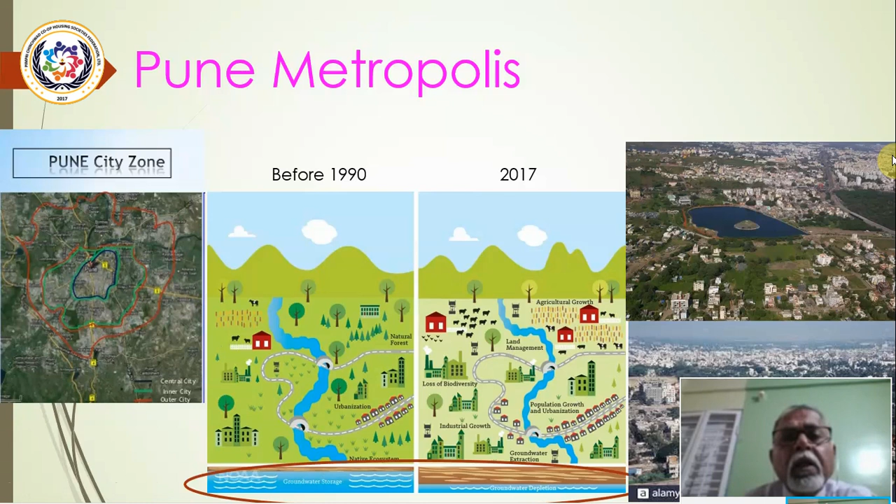Now, what are the lifelines? Himanshu sir has nicely explained about the watersheds, and these are the lifelines of the city. And Pune is really a city which has been blessed by the lifeline network. Earlier, if you see the network, every drainage was carrying the water.

Now, what has happened? Most of the drainages, or the nalas, or the rivers, or the rivulets, they have been made just like a cement channel. Is it a cement channel? My dear friends, no, not at all. It is a lifeline because the drainages are created naturally. Nobody has created them, and nature creates its own path where it gets least resistance.

The drainages are developed. Least resistance means where the rocks can be easily eroded by the river water. So you can imagine why the nalas are born only at this place. It is only because there the rock could be softer, the rock could be easier to recharge also. So this is how the lifelines are very much important from the Pune city point of view.

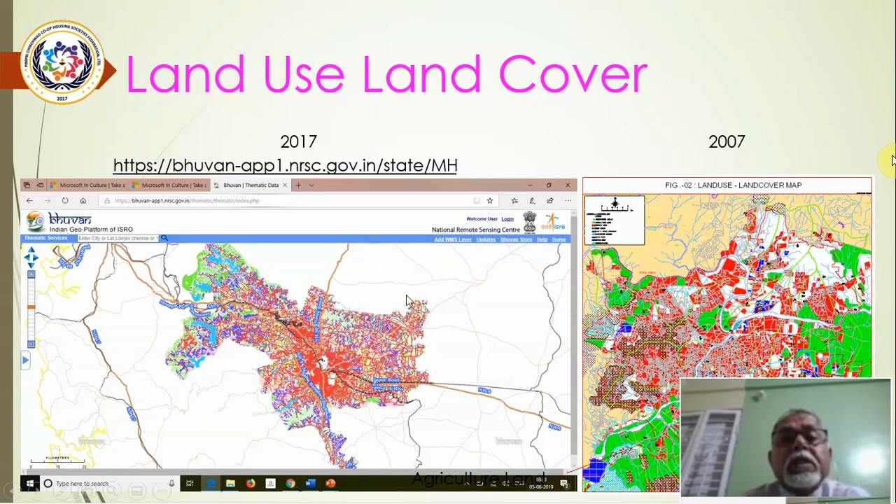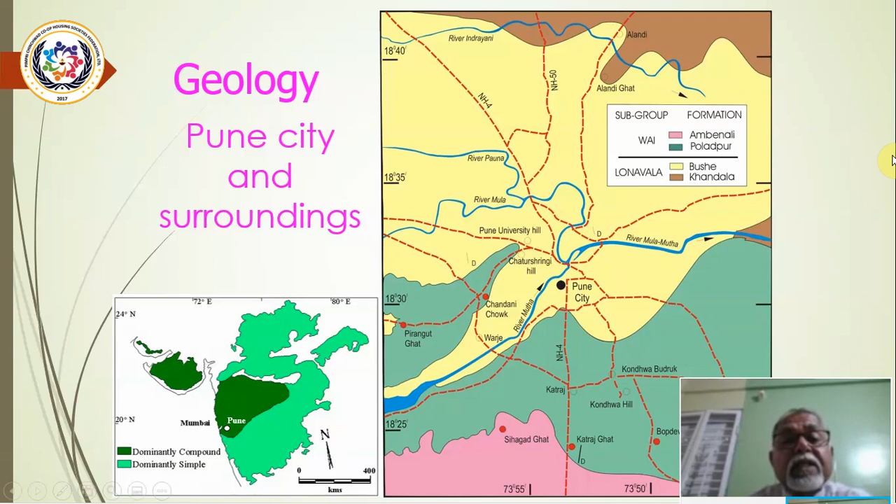Unfortunately, in Maharashtra or even the complete Deccan Trap, where we are sitting today in Pune city, the green color doesn't indicate that it can hold good groundwater. No, not at all, my dear friends. It has many limitations as far as groundwater storage capacity is concerned. One more map, that is a groundwater prospect map of Pune city I have tried to show you here.

Classically, the government of India along with the state governments have done a fantastic job. They have mapped the entire country, and the groundwater prospect maps are available in the public domain also. What they indicate, my dear friends, please try to understand.

Because Pune city, if you talk in terms of square kilometers, has surpassed Mumbai also. Considering the Pune and Pimpri Chinchwad metros, the area is more than 600 square kilometers. So you can imagine how many villages have been brought into Pune city, and how diverse is the geology below the Pune city.

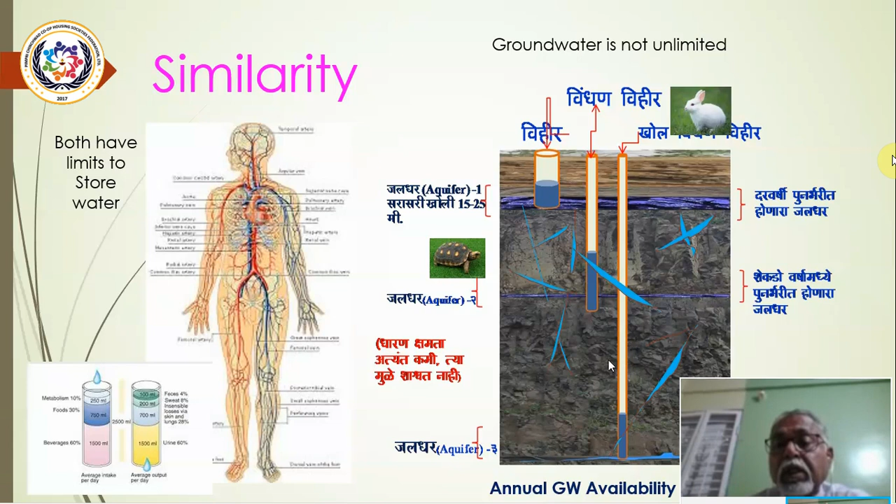So this water is taking hundreds of years, more than hundreds of years, and the recharge area is far away; we are not aware also where the recharge areas are. So that is why they are to be kept for scarcity, when we must get that water.

Again, one more science which is directly related is the pulse of groundwater. When you go to a doctor, he checks initially the pulse of your body, and based on that he tries to diagnose. Similar is the situation. Himanshu sir has shown you some of the graphs. I'm just trying to give you the idea why these are very important, because if you are measuring the water levels, then you are able to understand how my groundwater is behaving with space and

time. Because water has two dimensions. If you see the surface water, space and time, but as far as the groundwater is concerned, there is one more parameter, and that is depth. So that is why it is very important to get the support of a doctor who knows how the groundwater levels are behaving.

Because unless and until you go to a doctor who is learned, who is aware of the aquifer, he cannot tell you what is actually the problem and what actually is the solution and what has to be done.

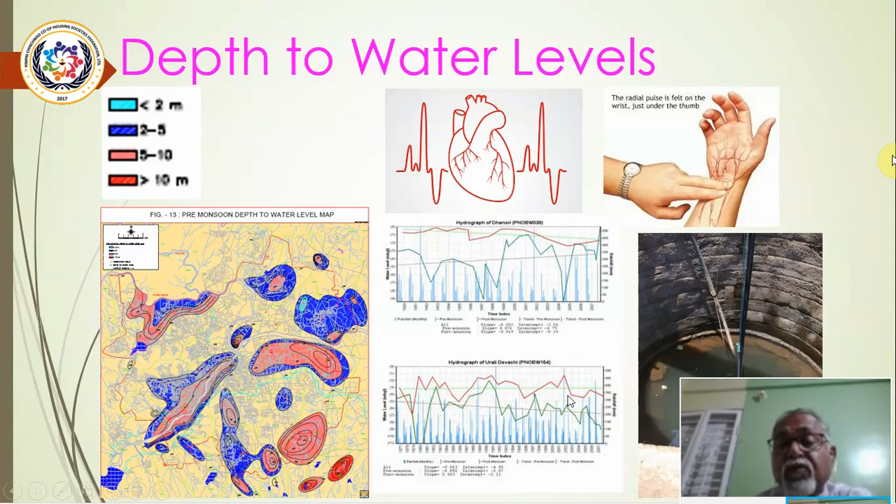Now, these are the maps, just to give you the idea that Groundwater Surveys and Development Agency in 2007 did the detailed hydrogeological survey for Pune city. And they came out with this map of the recharge areas. What are the recharge areas? These are some of the recharge areas by which you are able to know where the societies should go for the recharging of the wells, and which locations should contribute more to the artificial groundwater recharge.

This is the water availability and use. I'm not going into the detail, but just let you know the well density is highest in Pune city, that is 122 bore wells per square kilometer. My dear friends, the carrying capacity of roads is, if the road is a 4-lane road, then 4 cars can go at a time. And if that capacity is exceeded, what happens? You know, there is congestion, there is a traffic jam.

Similar is the situation. Now the well density is supposed to be technically 8 wells per square kilometer. Now it is 122. So you can imagine, in one 1 liter Coca-Cola bottle you are putting 122 straws. So you can imagine how much you are going to get, and why the borewells in Pune city are getting dried up in the months of March, April, and May, slowly. So groundwater is very important, especially during drought or during scarcity.

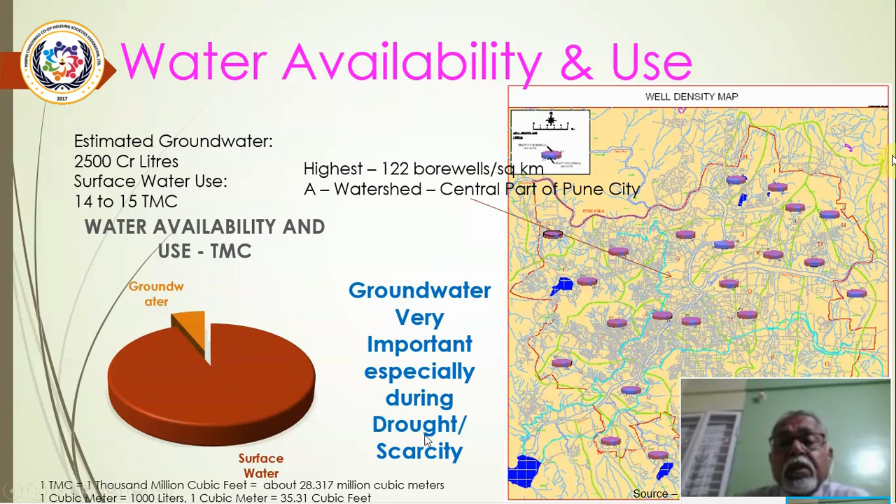Now, this is the list of the areas which are potential recharge areas. If you see the tankers plying in Pune city, in many societies the tanker is the lifeline now. Maybe we are in the month of May, so probably the tanker could be the lifeline for them. But unfortunately, if you see the areas from where they are abstracting, you will find that all the tanker suppliers have drilled borewells or have dug wells in these recharge areas itself.

So that is why they are not allowing the recharge to happen. Maybe naturally also, and maybe artificially they are not allowing. So because of this, the recharge into the aquifers is not happening completely. So in many cases, in the heart of the city, the recharge area could be located maybe in the north, maybe in the south. That has to be identified.

And luckily, ACWADAM came out with the aquifer map of Pune city. So we must use those maps for this purpose, and then only we can say confidently that whatever rainwater is falling on our society can definitely go into the aquifer. Please try to understand it.

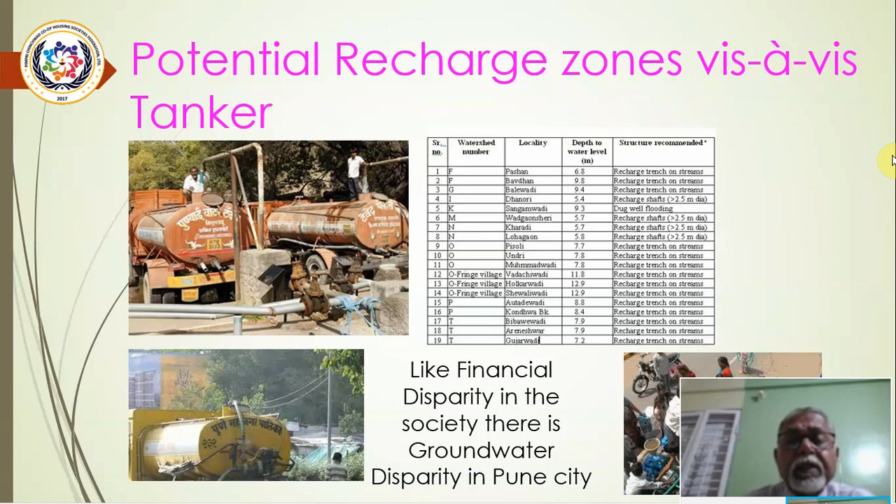Similar is the situation. If the society is asking that we want to do artificial recharge, but unfortunately the aquifer is not of good potential, then maybe that society cannot go for the artificial recharge. So artificial recharge is not possible everywhere. Maybe it could be possible in those places where we have a good aquifer potential, good recharge capacities. There only we can put a good quantity of groundwater.

Why is sustainability of groundwater very much important? My dear friends, I'll invite your attention to research published in Nature. Five scientists from different countries came together and published a research paper in Nature that says that in many countries the aquifer, that is the groundwater, could get exhausted. In many countries, the aquifer is going to get dried up also. So these are some of the hints which have been given by recent research.

Similarly, recently the Honorable National Green Tribunal, NGT, has given a decision in Delhi that the recharge structures which have been constructed, especially in municipal corporation areas, are contaminating the groundwater. So they have constituted a committee to find out what is the reason behind that and who is the culprit. Now, based on this scenario, does it mean that we don't have any remedial measures? Yes, my dear friends, we too have remedial measures.

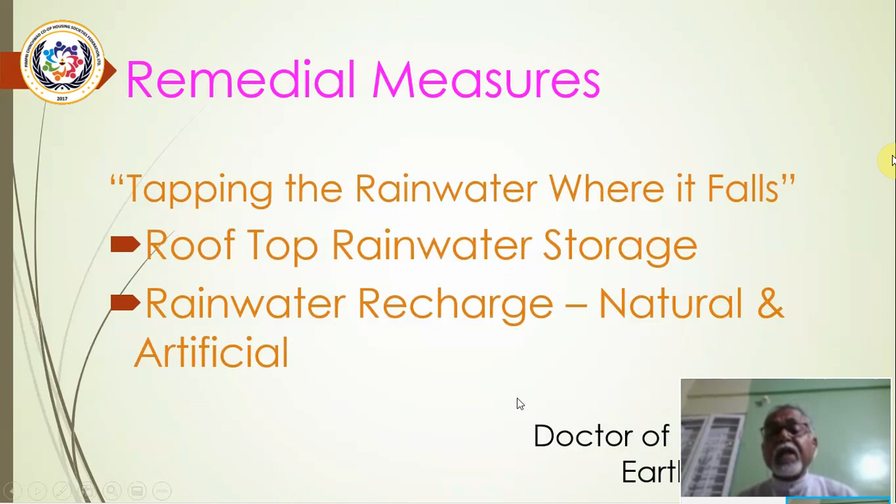So what is important here, my dear friend, the doctor of Mother Earth must be consulted. Then only you will be able to understand what is the scenario in your society. Now, what are the different tests which are very much important? Like when you go to a doctor, the doctor gives you a list: go for blood checking, go for the CT scan, go for the X-rays. These are some of the tests which we are very much aware of.

But for groundwater also, please try to remember that these are some of the scientific tests which should be carried out, and then only you can decide whether you can go for artificial recharge in your society or not. You can call it a protocol.

The protocol first says that geohydrological studies are very much required. Unless and until you are aware of the groundwater availability below the society, that means the rocks occurring in the society, unless you are aware of the hydrogeological scenario, it will be very difficult to tell you how much quantity of water can be stored additionally into the aquifer besides the natural replenishment. That means, in other terms, whether the aquifer is available there or not.

Then third, a very important parameter: how much is the storage capacity? Let me explain. If you take a tank of 1 meter length, 1 meter breadth, and 1 meter height, that means it is a 1 meter cube, that is equivalent to 1000 liters. Suppose this is a tank and this is a rock which is occurring besides your society.

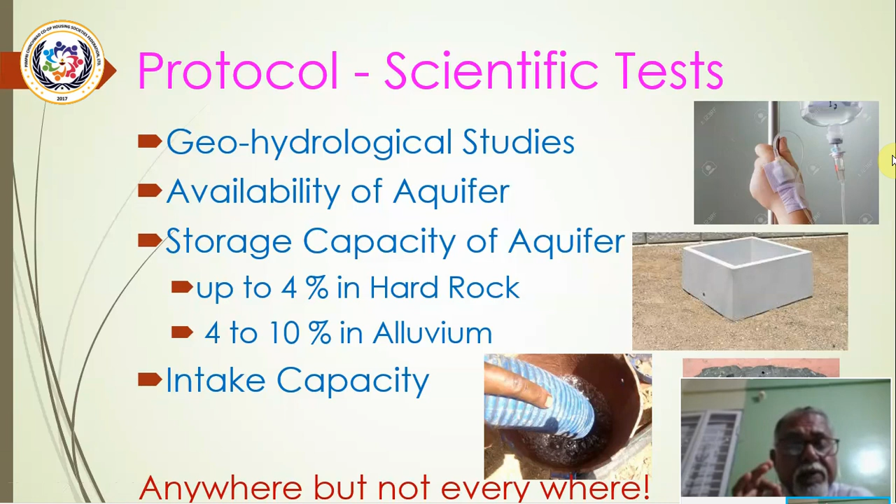So, anywhere but not everywhere. Please try to remember this phrase forever: rainwater harvesting anywhere, but not everywhere.

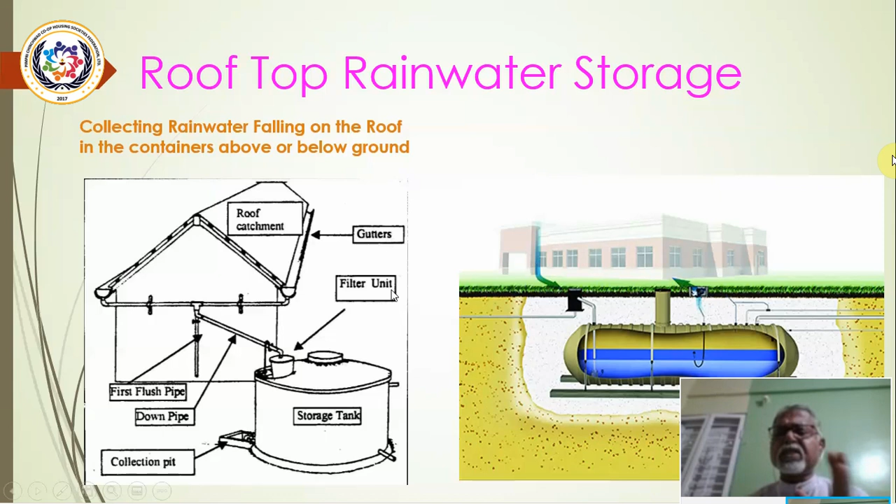This water can be stored above the ground or below the ground. These are some schematic pictures I have tried to show you, of how you are able to calculate this, my dear friends.

The formula is very simple. Suppose this is your roof area - what is the area of the roof in square meters - then you have to multiply it by the roof coefficient and by the rainfall in meters. Meter means we measure the rainfall in millimeters.

So 1000 millimeters is equal to 1 meter. The rainfall in millimeters has to be converted into meters, and you have to multiply by 1000 so that you can get the value directly in liters.

Likewise, the coefficients are different, but as you go down onto the soil, the soil coefficient is not given here, but if you look at the coefficient of soil, it is only 0.1.

So you can imagine, 90% of water, when it falls on soil, gets converted first into soil moisture, and when the infiltration gets completely filled to the capacity of the soil, then groundwater movement starts.

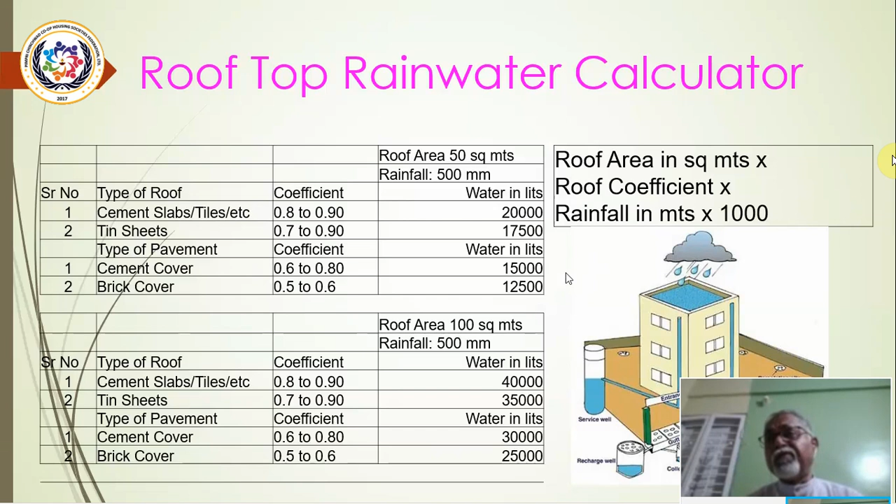Last year, in 2019, we saw the havoc that happened in Pune city due to rainfall. It was only because most of the rainfall fell within a short time, and because of that, the surface runoff was very high.

Now, artificial recharge through dug wells and bore wells is possible, but the bore well should be successful.

Please try to remember these are the natural conducive media. So for the discharge, there is one more test for a bore well - societies that have a bore well should perform that test.

If they are yielding more than 2000 liters, then only that bore well will accept the water artificially. The scenario is similar for dug wells also.

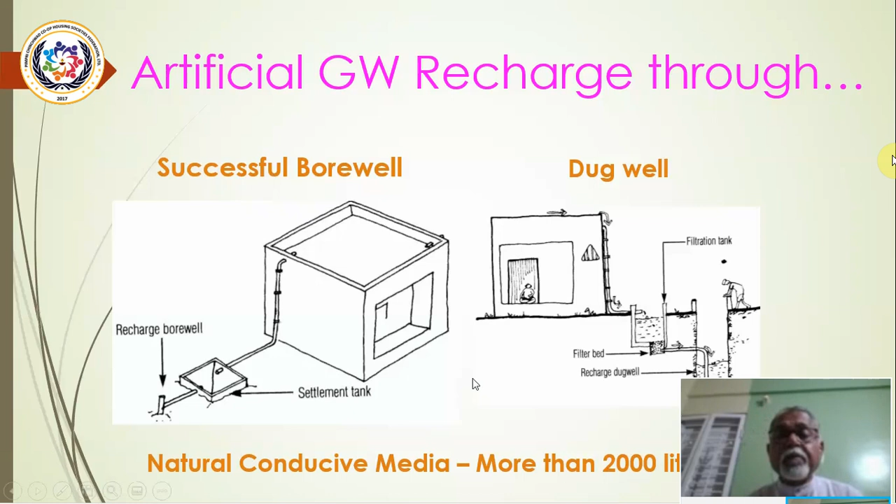You have to construct a filter bed. As you can see, this filter bed is very essential.

Now, one more location-specific artificial recharge measure is the soakaways. So soakaways are also very important here.

I wanted to show you a video here, but that may not be possible because I'm missing the link. Luckily, Pune Municipal Corporation tried these soakaways on Taljai Hill, where they used cement bricks that are all pervious bricks.

So I think if societies have cement blocks or paver blocks installed, wherever they have used them, they can replace these with soakaways.

Now they are available in the market, so that most of the water falling on these surfaces can slowly go into the soakaways or slowly pass through.

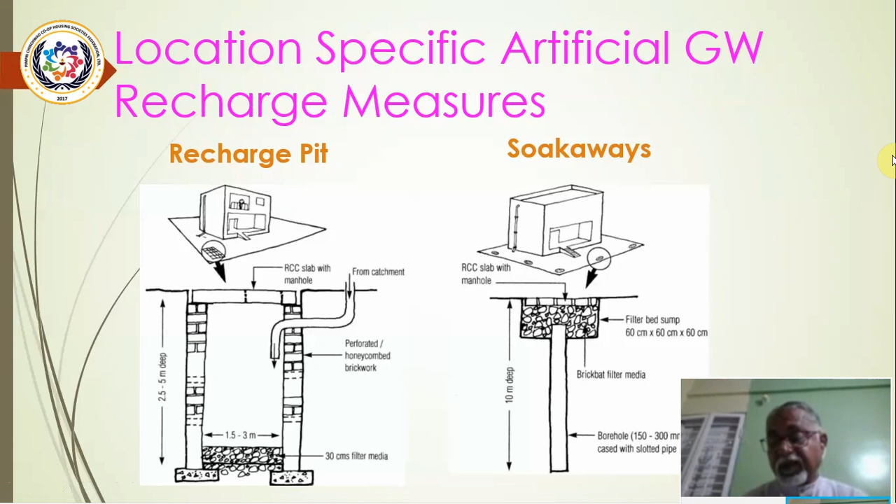We can also construct filter beds, and through those, most of this storm water flowing over the surfaces can be taken to the groundwater.

Now, a filter is mandatory and very important - very essential, because unless this is done, the rainfall falling over the roof is a problem, since the roof is nobody's area at present.

Roof is nobody's area, nobody cleans the roofs, so dust gets collected over the roofs.

During the first shower, along with the dust, bacteria can also come, because the house of bacteria is your dust.

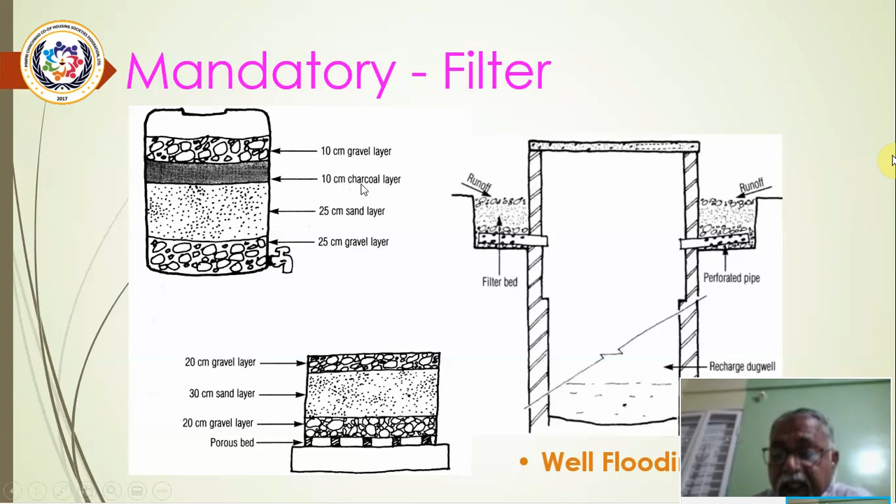They get accumulated or absorbed over the dust, and get passed into this recharge system also. That is why the filter is very much essential. Without filter, there are various filters available, and they reduce not only the velocity of water, but also stop the particulate matter. If you are introducing coal or charcoal, they definitely absorb some of the bacteria also.

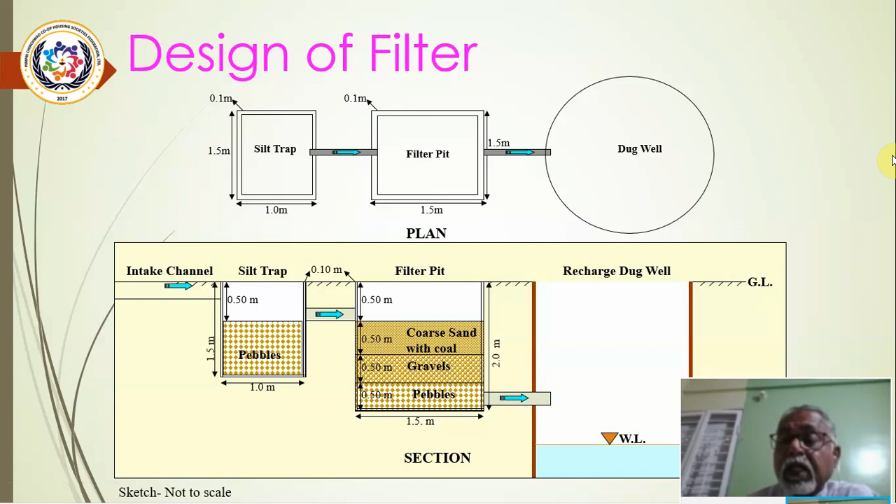Now this is the design of the filter, and that is how it looks. A silt trap, a filter pit, and a two-pit filter system is recommended by government also. If it is a rooftop, then it's okay, you can directly use a filter pit. But if it's the storm runoff, then a silt trap is very much essential. Two pits are very much important, and you can connect them from the top, and with the help of coarse sand, coal, gravel, pebble filter, you can put the water into the dug well, because the dug well water you are using, even if it is for day-to-day life other than drinking, should be of potable quality.

The quality needs to be definitely tested, my dear friends. The testing lab of Pune GSDA, located in Shivaji Nagar, is an NABL accredited lab, and they charge minimum for testing water quality. Please do get this water tested annually, because you are not sure. At least twice a year, pre-monsoon and post-monsoon, you should test the water if you are using groundwater, because after the rainy season, the groundwater may get contaminated with bacteria. If you are using it without testing, it may harm.

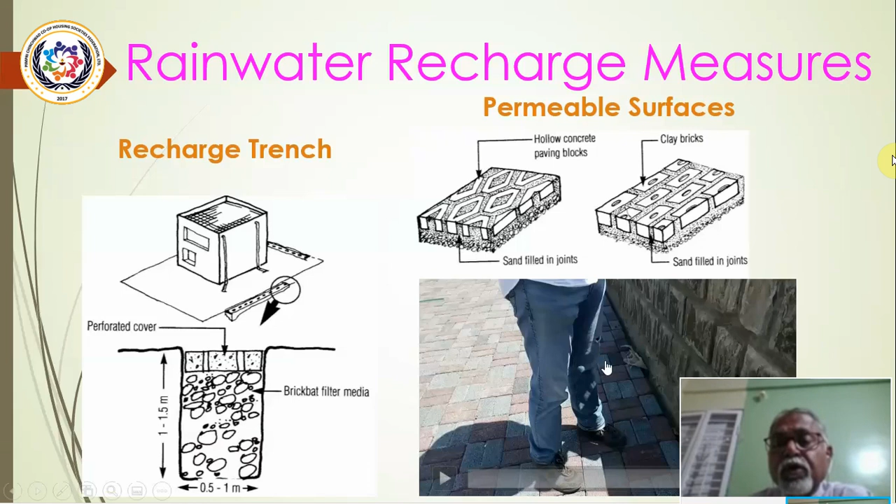So that is why it is very good to test it. Now this is the video which I was showing, some of the permeable surfaces. You can see how that brick, which has been prepared with the help of cement, is a porous one. This brick is of the same strength which a paver block has. This is at Taljai Hill, Pune.

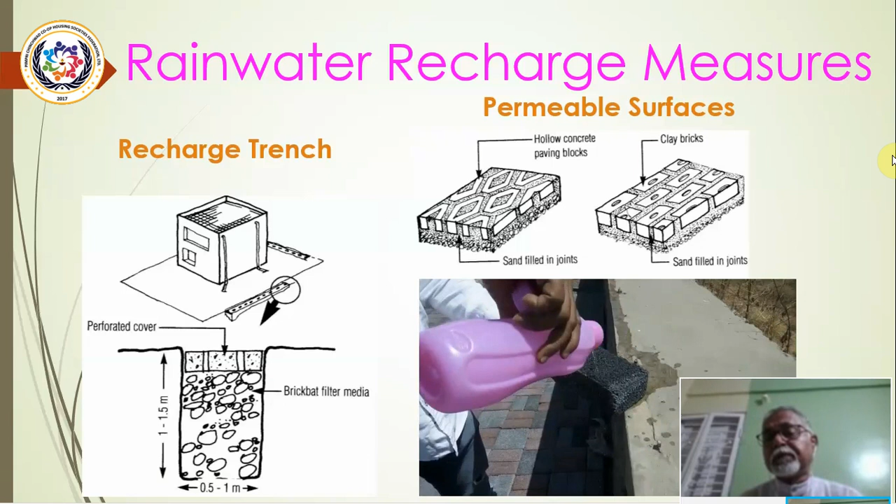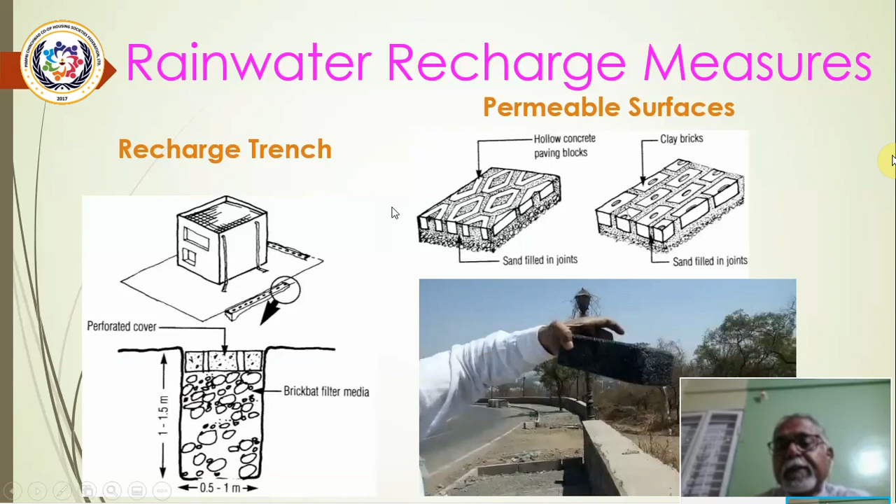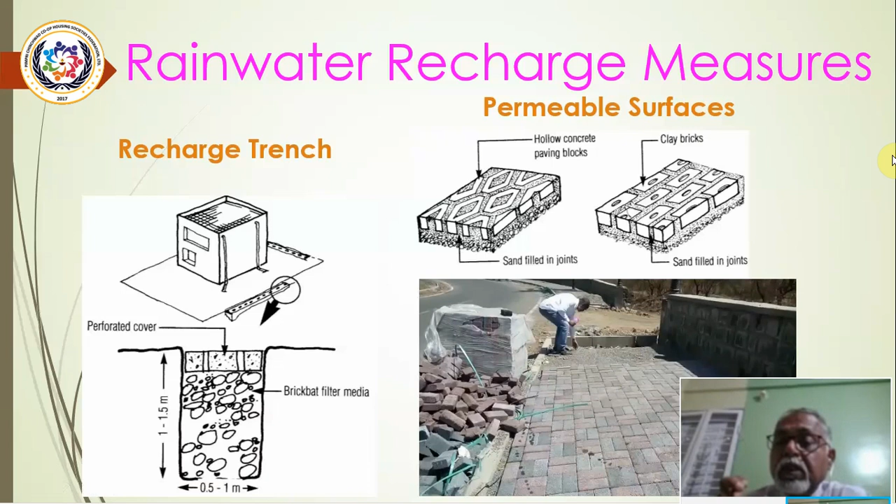So you can use these permeable surfaces. We have tested this by mission groundwater also, and luckily, after discussion with the Pune Municipal Corporation, they have agreed that everywhere, at least in the areas where footpaths are there, those footpaths can be used as media for artificial recharge also.

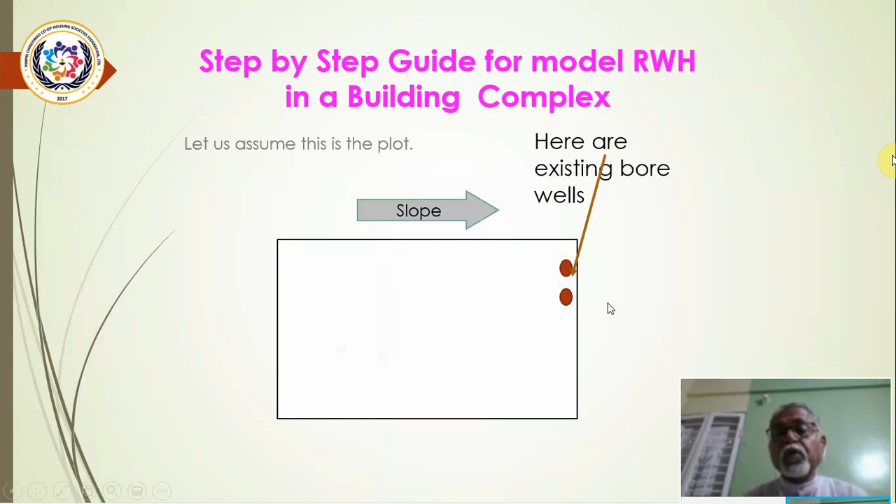Now, step by step, I will try to show you how in a building complex you can go for an artificial recharge structure. Suppose you have existing bore wells, then it is always advisable to go for the construction of new recharge bore wells, so that the quality and the quantity can very well be saved.

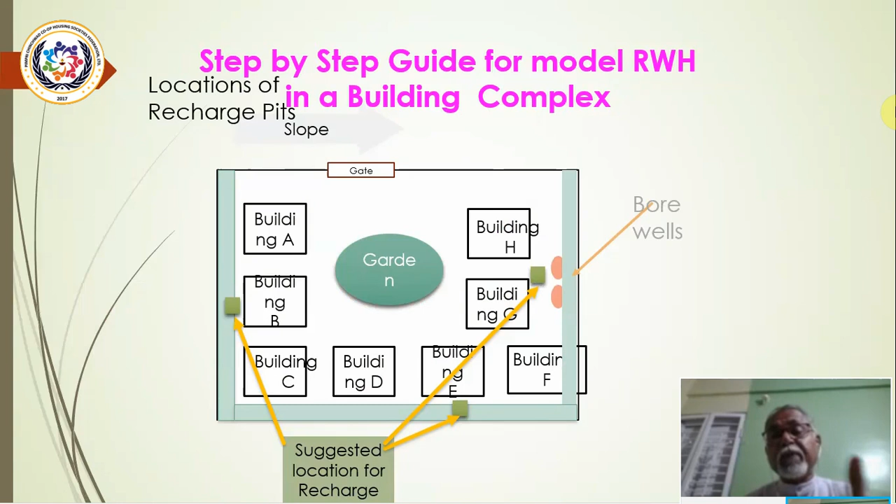Suppose if these are the buildings, and based on the aquifer availability in your society, if the groundwater is moving from this side to this side, then one bore well can be constructed in the upstream and one in the downstream of the society, so that in both bore wells the large quantity of water getting available from the rooftops of these buildings can very well be used for artificial recharge. This is how you can plan based on the database available, that means with the architect.

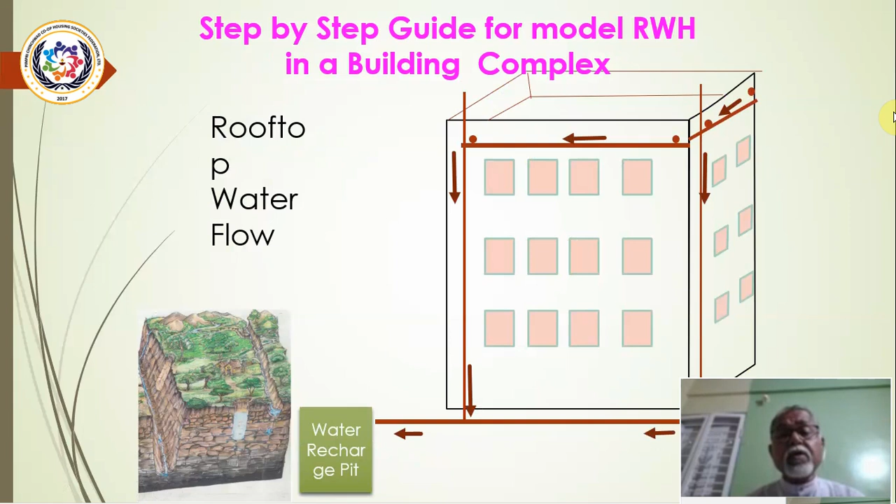So this is how a recharge pit is constructed, and the complete water flows in. For this purpose, it is always better to go for mathematical calculation. A simple formula which I have shown you has to be used in calculating this, and based on that, what is important is that you have to go for the location-specific measure for artificial recharge.

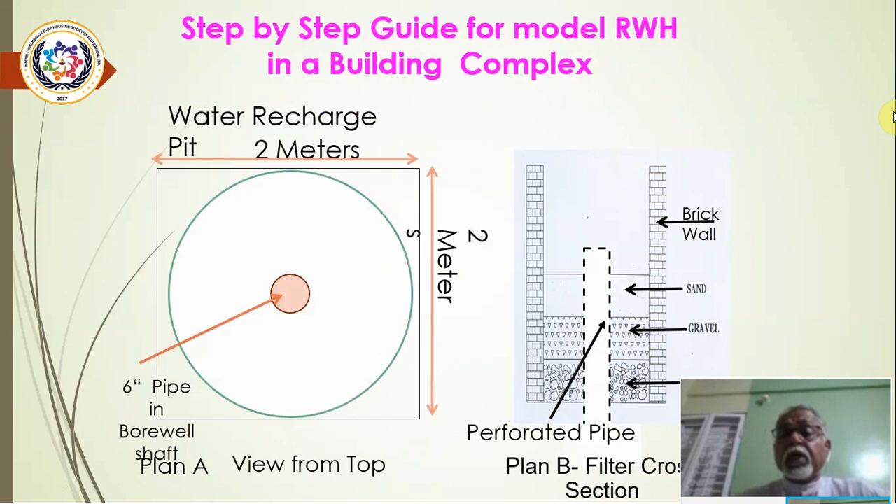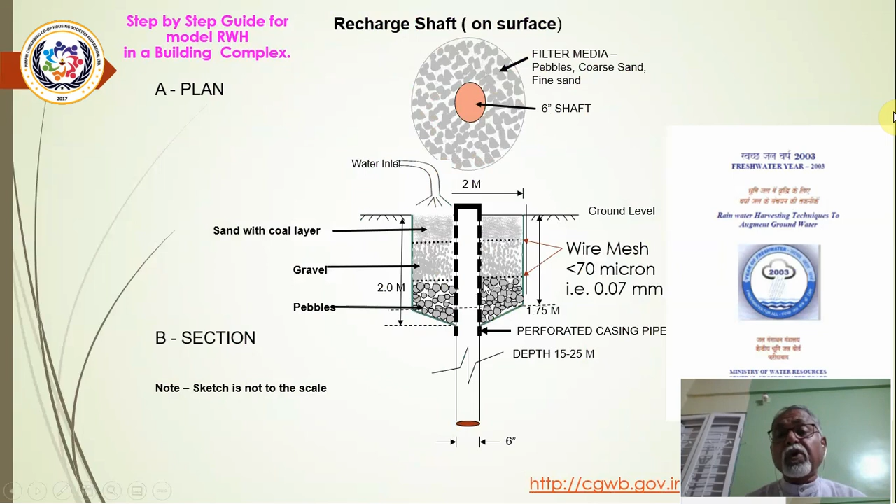In a recharge shaft, you are drilling a separate borewell exclusively for artificial recharge, based on the availability of the aquifer. Put a filter media, and mesh is very much important. Likewise, you can go for the construction of artificial recharge structures. The artificial recharge structure is just like a bypass. This is how one structure works - this is just for your understanding - and see how the groundwater moves into the aquifer if you drill a recharge shaft at a proper place.

So this is how, through a recharge shaft, the groundwater moves into the aquifer, and if the aquifer has a very good capacity, then based on the capacity, we can go for this bypass surgery also.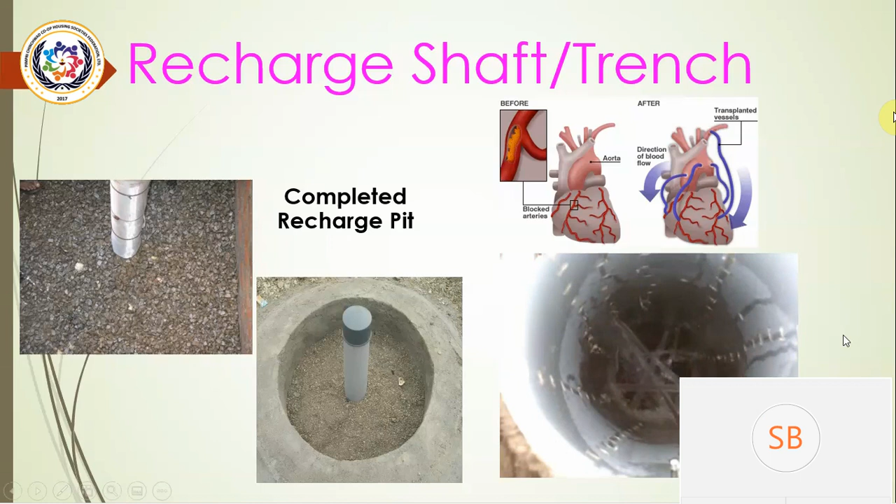plan has been overlaid with the aquifer map, and now we can definitely advise Pune Municipal Corporation that suppose the area of survey number 41 is not reserved for garden, then we can recommend them that yes, it is very much required. Luckily, this is the area which has been reserved for garden.

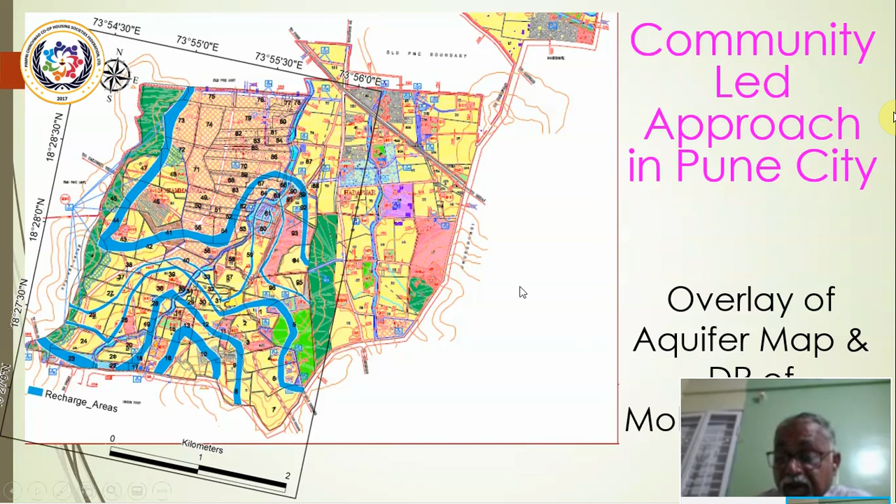So this area you can use for artificial recharge, so that based on the slopes and other parameters, we are able to go for the community-led approach even in urban areas like Pune. We are carrying out one experiment in front of the Dr. Dada Gujar school in Mohammadwadi. This is the plan which has been prepared.

Thanks to the local corporator, he has principally agreed, and he said that whatever you want, I'm going to give that much money for artificial recharge. He wanted to create an experiment. He wanted to show this is how.

Now this was earlier an earthen nala bund over which Pune Municipal Corporation has constructed a road, and then subsequently the bridge also. And when this was dug for renovation for artificial recharge, see how eco-friendly it is. The spring started coming. Even the birds started coming. This is how the fresh water is coming.

So you can see it was earlier just a waste, but now after renovation, this picture we took in the month of February. You can see the fresh water started coming into it. That's completely spring water. So this is how we should revive the aquifers and the old existing structures.

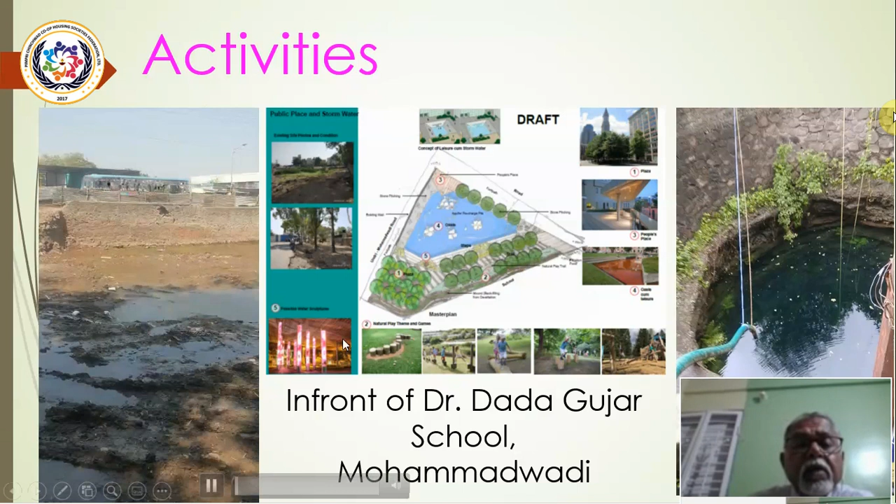Below this earthen nala bund, there is a well. From this well, tankers are plying in Hadapsar, meaning the complete Mohammadwadi area and adjoining areas. So there are more than 10 wells downstream of this check dam, downstream of this earthen nala bund. Now there is one more area very near to that, 2.5 kilometers away.

A British regime KT weir is there. Here you can see the height of the KT weir. Here Dr. Kulkarni, you can see he is more than 6 feet. So the height of the KT weir, and you can see how much garbage has been put all along these drainages. So this is a British regime KT weir. A KT weir always collects the base flow which is coming.

In August 2019, we tried to measure the base flow, and we were able to capture the base flow also. Luckily, one well is located there, which in 2019, Kumar Pebble Park Society, I don't know whether any representative from them has joined or not. This is the society, and they have used this well water, and this well water is of potable quality. Be assured. So you can see the weir has a catchment of more than a kilometer.

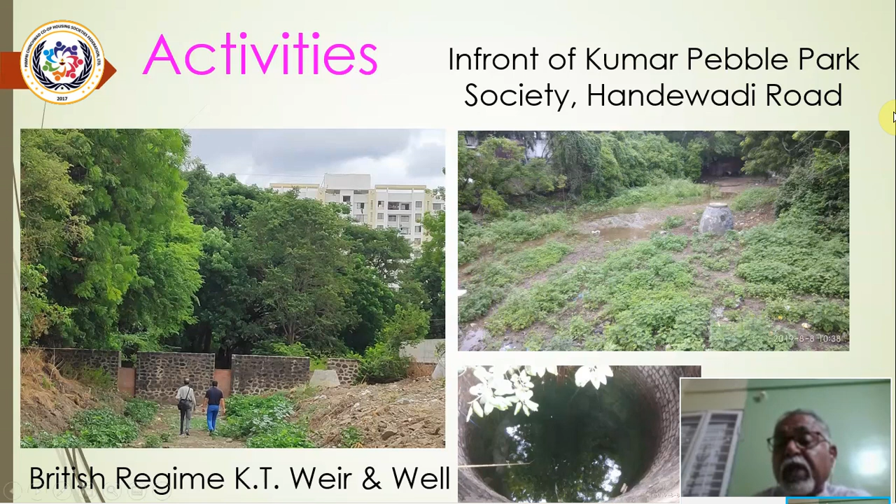So if we just renovate it. No gates were installed. Luckily, some society members came forward and installed these gates in August 2019. But unfortunately, they were not inserted at the right time, so it could not collect the water. So that corporator has agreed that he will renovate this also, so that it can be revived. In this way, the community structures can also be revived.

Now, usually the recharge bore wells, what are the details of the recharge bore wells one should go for? It should be separate.

That is the first important thing that has to be taken care of. And based on the aquifer disposition, maybe 20 to 30-meter depth. The number could vary between 2 to 4 also. And maybe on the upstream side, as I showed you, the storm water, if at all you are connecting it, should be connected by using the filter media. Excess water which is coming into this has to be taken out, has to be released.

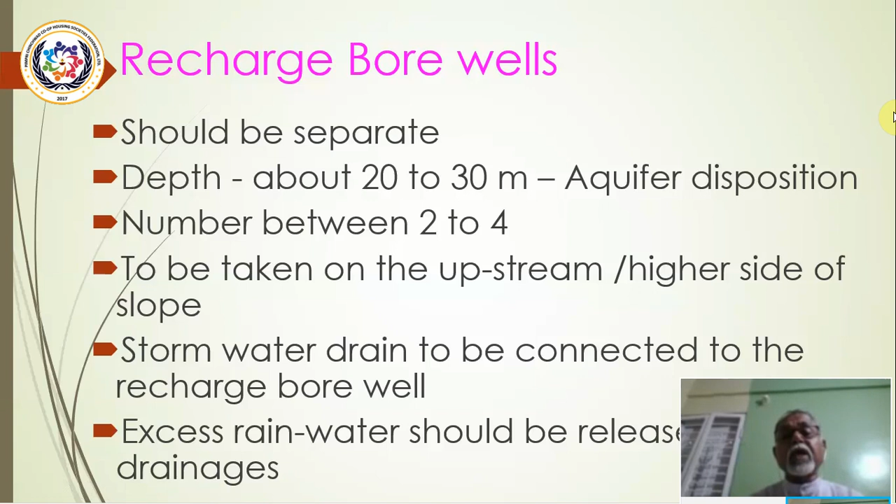First precaution, raw storm water should not be used for direct artificial recharge of groundwater. Suppose you are injecting into the dug well, don't put raw water. It will affect the quality, it will contaminate the groundwater, and once the groundwater gets contaminated, it is very difficult to flush it out. It's not like a surface water dam where you can pass the garbage downstream. It's not possible. Suitably designed, area-specific filters need to be used to filter the particulate matter. Prevent the particulate lead, my dear friends.

One very important hint that I just wanted to give you. Everywhere we can see that all along the roads there is oil seepage, there is petrol seepage, and all these are contributing to the groundwater. Lead is coming, chromium is coming, all other toxic pollutants are coming into the Pune groundwater. So we have to be very careful. That's why I requested you to go for testing of the water, then technical capacity building of the citizen groups and NGOs, for which today we are assembled here.

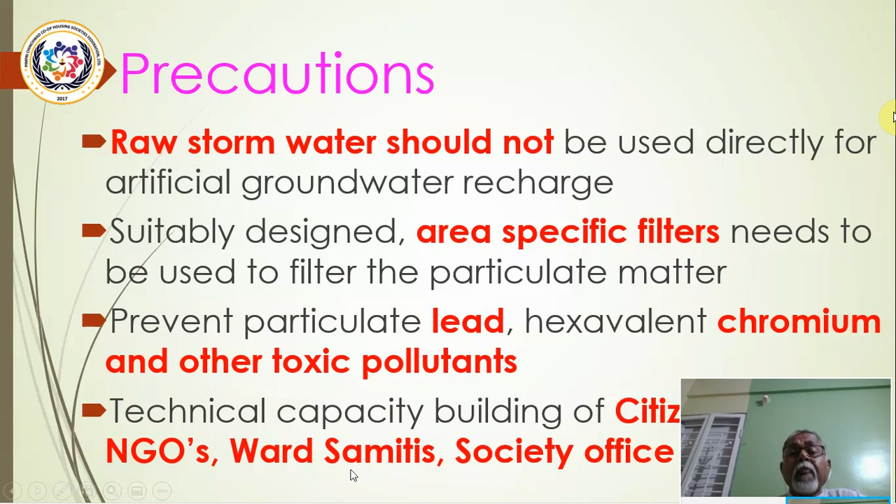Now, what are the legal provisions and incentivization? One legal provision: on 10th of March 2005, the Government of Maharashtra gave directives to amend the Maharashtra Regional Town Planning Act 1966, wherein they made it mandatory for societies having areas more than 300 square meters. They gave an incentive of 5% tax rebate on construction of rainwater harvesting structures. Please take out your bill. Now it is due also. This year, tax we have to pay before 31st of May. So you are going to get 5% additional benefit also, and that benefit is coming for each individual flat owner. Please remember, this is for each individual flat owner.

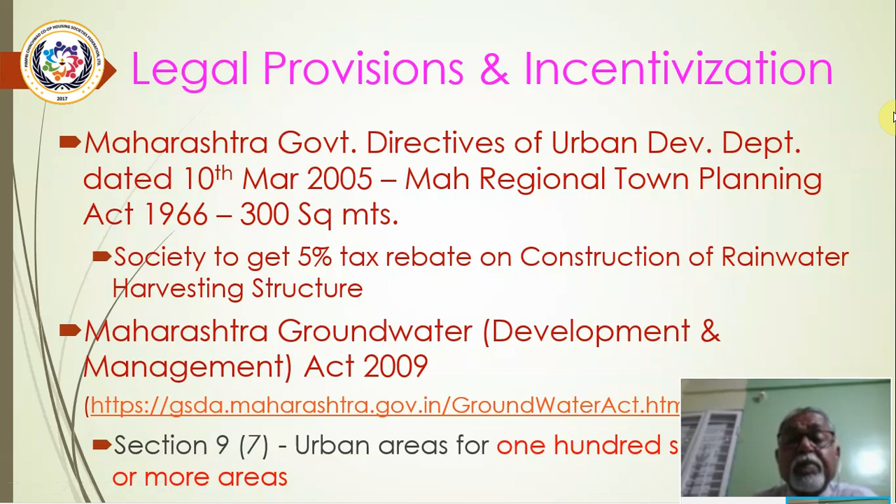Then the Maharashtra Groundwater Act 2009, which came into force on 1st of June 2014, says under section 9(7) that in urban areas the area has been reduced from 300 square meters to 100 square meters. So it is mandatory, but mandatory has to be through the bylaws, because after the 74th amendment, all the urban local bodies have been empowered to take their own decisions.